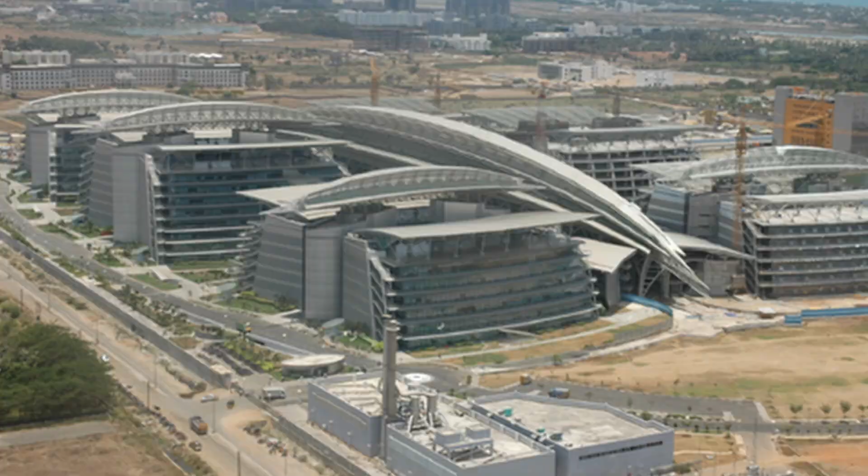This established design commitment in the practice of green building concepts resulted in him being selected as chairman of LEED India. He was also the chairman of the Chennai chapter of IGBC from 2005 to 2022. The Bureau of Energy Efficiency under the Ministry of Power, Government of India, which initiated the Energy Conservation Building Code, has identified Mr. Raghavendran as a resource person for improving understanding and promotion of ECBC norms among stakeholders of the building industry.

Mr. Raghavendran's contribution to architectural education deserves special mention. As a member of the AICTE, the All India Council of Technical Education, All India Board of Studies, Governing Council of National Institute of Design, Ahmedabad, and Academic Council of Chennai University, Chennai, he has contributed significantly to the advancement and revamping of technical education in architecture in India to suit the evolving needs of the industry.

He has held offices in several professional organizations such as Fellow of the Indian Institute of Architects, of which he was chairman of the Tamil Nadu chapter in the early 80s, and a member of the International Affairs Board of IIA and an International Associate of the American Institute of Architects.

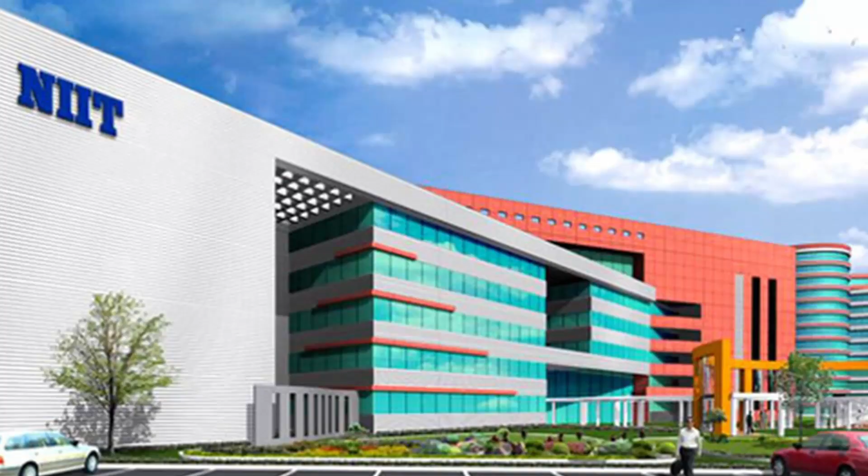Mr. Raghavendran is a recipient of several awards, including the coveted Padma Shri in 2011, IIA Design Excellence Award in 1995, the prestigious Architect of the Year Award in 1996, IIT Kharagpur's Distinguished Alumnus Award received from the Honorable Prime Minister of India in 2011. He was also recipient of Boundless Achievement as Architect of the Year 2023 by PhD Chamber of Commerce and Industry.

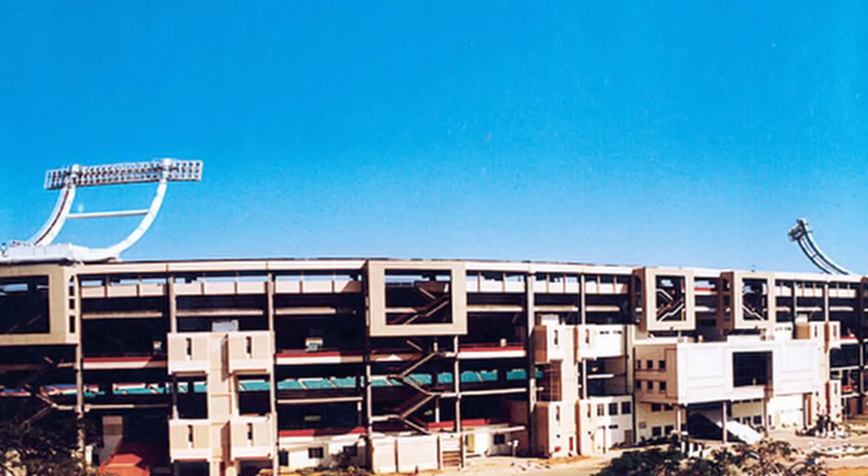USGBC Leadership Award 2020 by US Green Building Council, Construction Industry Development Council Vishwakarma Awards 2019 under the category Achievement Award for Industry Doyen, Indian Institute of Architects Hall of Fame Award 2012, Patterson Cancer Center Award 2003, and recognition from several professional publications such as the Economic Times, ACETECH Award 2007, Construction World Top 10 Architects Award 2007, 2009 and 2010, CWAB Platinum Award of Excellence and Construction World Architect and Builder, CWAB Award 2016.

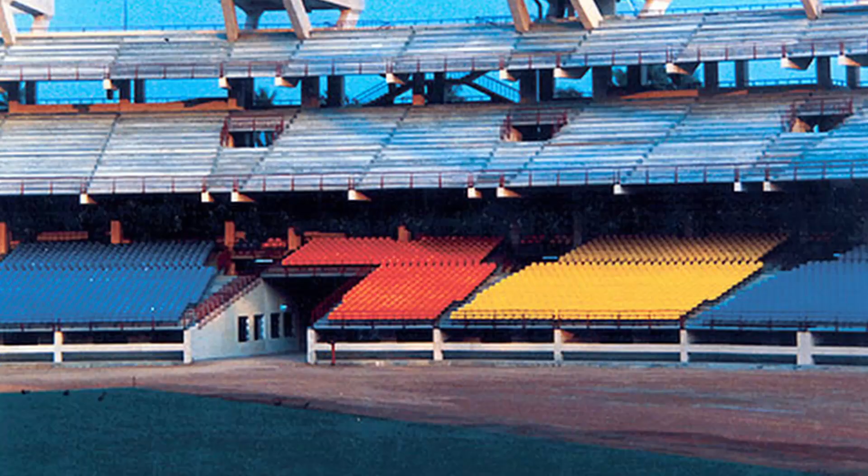He has received special trophy commendation certificates for professional services rendered by him for the Jawaharlal Nehru Stadium, Chennai, designed for holding the South Asian Federation Games 1995, received from the Chief Minister, Government of Tamil Nadu. His works have been featured in several foreign and Indian books, professional journals, and the press.

I have not really specifically prepared anything for this talk, but I was told I should show some works. So what I thought was I will just walk through, from the time of my earliest days and earliest works till now, not as an exhibition of each project or what is unique about it, but more as what it does to us - to the person who designed it, to the people who use it, and to the field of architecture itself - in terms of what goes into making that product of design a success.

Over almost six decades of work, I've learnt a lot, and each project is a learning experience, and learning is never an end in itself. You're constantly learning. That desire to learn and work hard is what makes an architect a successful architect. So my advice to students is: never stop being curious, be inquisitive, ask questions. No matter how stupid you think it may be, it is not stupid. No question is a stupid question. So please, be free to think.

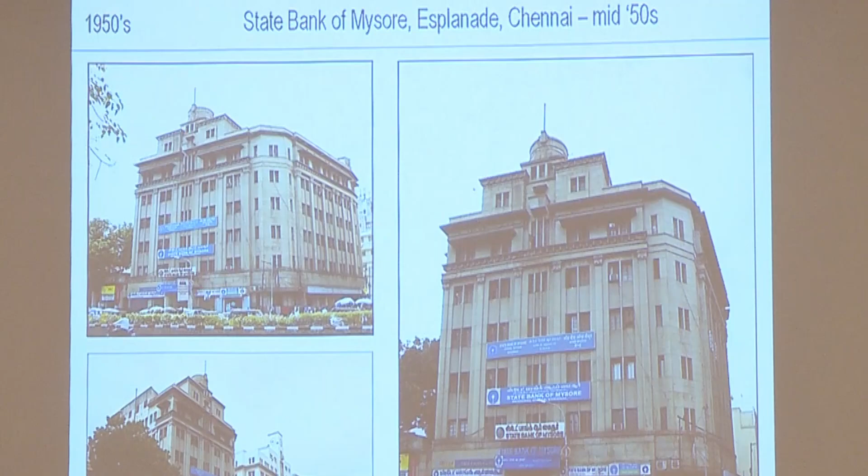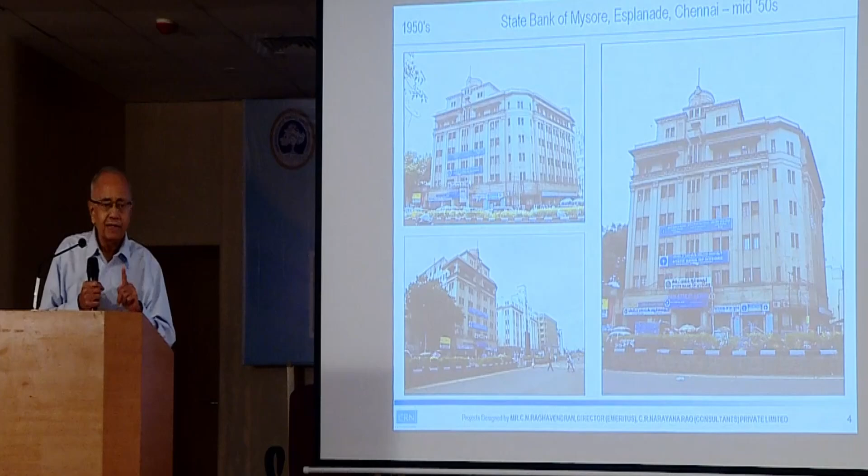I was just sitting in the drawing office, maybe 6 or 8 years old, watching the persons who were drafting or drawing it, and I was not attracted by this. I was only attracted by the pencil that they're using, the number of small pencils they'll throw away each day. I used to think, how can somebody consume so many? Those days there was no computer, no pens, it was just a pencil drawing, hand drafted.

So I was curious that the pencil becomes small, and being frugal - I mean, Indians are frugal, I think South Indians are more frugal than anybody, and therefore you don't really throw away resources. So even if a pencil becomes small, you'll have a self-designed pencil holder, and they'll use it till the last bit. Now, that used to attract a 6-year-old boy - you'll see a tall pencil becoming a small pencil. So I used to go and sit and see what they do on the drafting board.

And then I saw lines being drawn. I was curious about the meaning of these lines. You draw some lines, write something - what does it do? After some time, you find that it becomes a building. So I was fascinated by the thought that a line could become a building. This transformation is what interested me those days, and therefore, as a small boy, I was exposed to a situation like this in my father's design.

What was very common those days was an Art Deco building. It's a classic Art Deco building built in mid 1950s, for the Mysore Bank, and it's still there today.

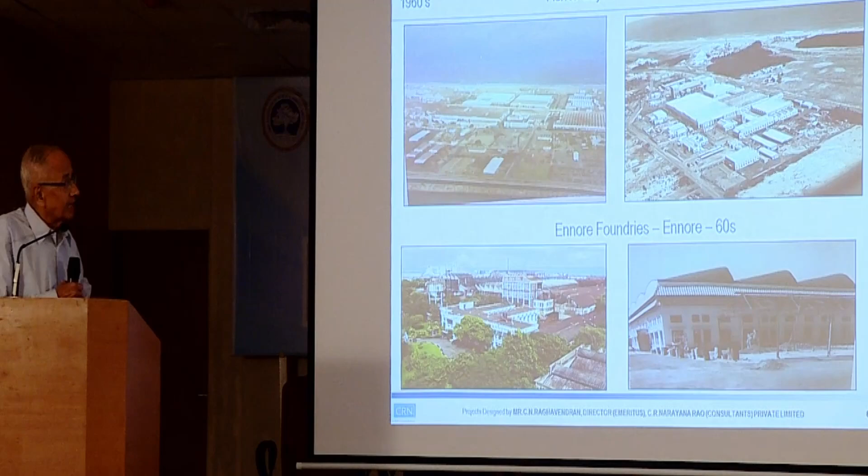In fact, my particular attention is to the last slide, bottom right hand side. This again was done in early 60s. The thing that again influenced me was the technology part of it.

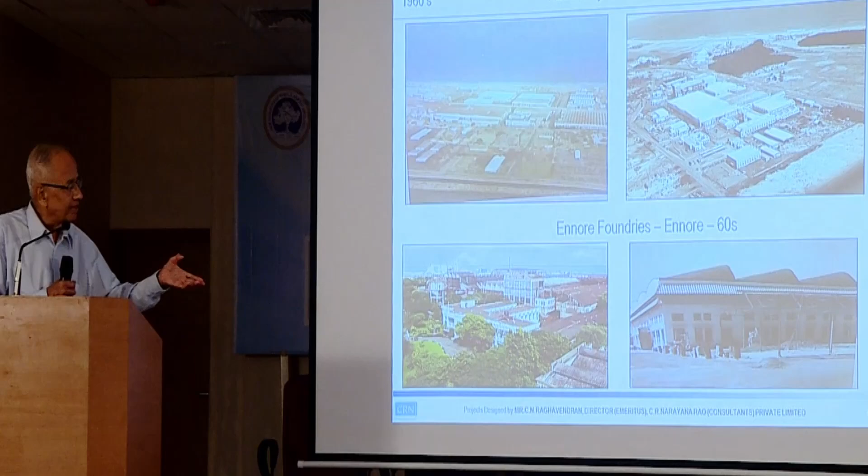Look at the roof shell of the factory building, which had a concrete shell - it's a concrete shell with three-dimensional change in shape, doubly curved and precast. To be done in that year, it's fascinating. Such things were fascinating to me, and therefore later influenced my work also - very seriously, the climate and the technology.

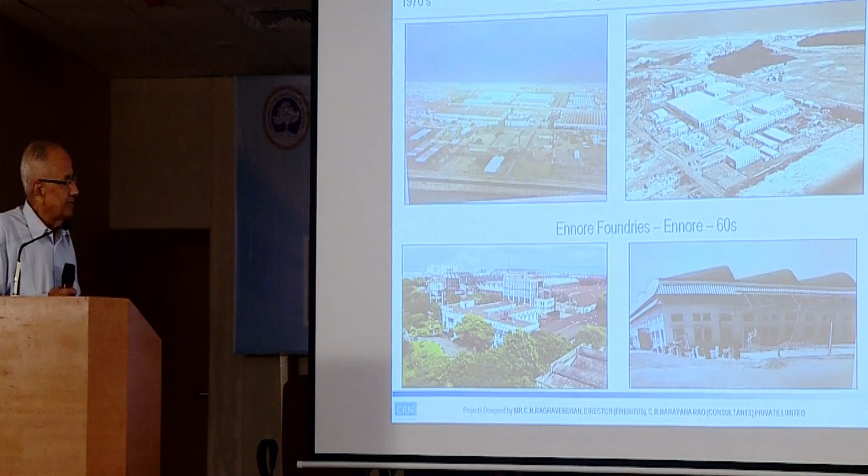This led me to... this is one of the earliest works that I have done. It is again a concept of mixing the lighting for an industrial building, a large industrial building, and not going for steel but precast.

Again, precast is a technology as early as the 60s. In terms of slab and beams, they were concrete, precast and erected inside, so that the construction would become less maintenance requirement and also long lasting, and the fact that it can be done faster.

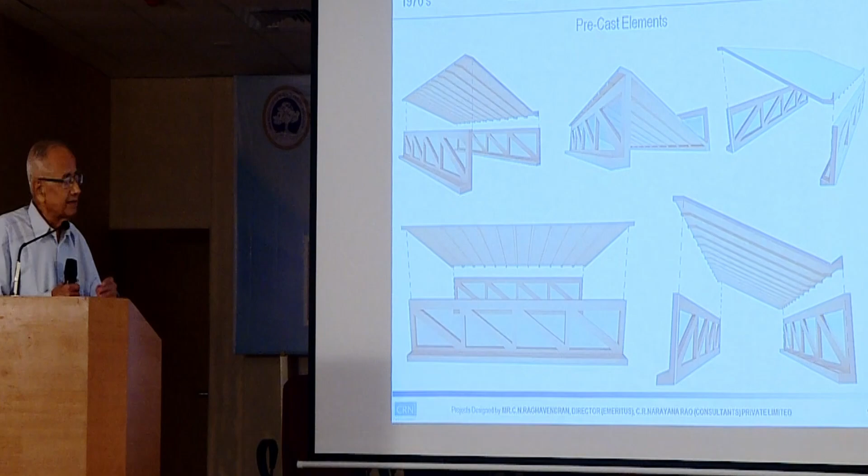So the orientation of the architecture and the structural element, and the understanding of structure for an architect - the importance of it, I came to realize at that point of time.

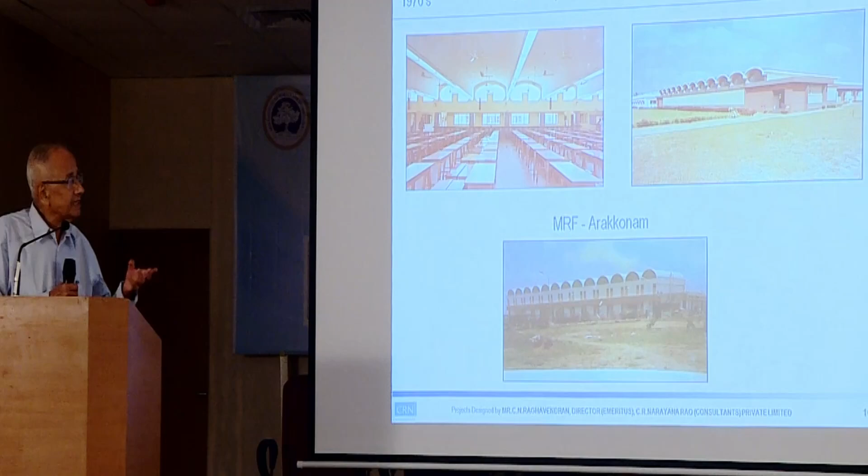or anything or structure. But the requirement dictates an architect to choose a structural solution. This solution of a long span shell roof did not come from a structural engineer, but an architect.

like the architect instructed design which the structural person carries out. So the concept of a shell is again influenced from that earlier factory where you had a doubly curved roof.

So this kind of a double curvature gives flexibility, gives rigidity to a thin member. The thickness of concrete will be only 4 inches, but because of the shape, it gets the capacity to...

sustain itself and also sustain the load. I'll show you some other work, an extension of the same concept, later.

This again is a reflection of a west-facing building. I used to take that climatology very seriously, and this climatology was also taught very beautifully, well done. And today, of course, you have a lot of software which actually helps you to understand the movement of the sun and the movement of shadows.

But it was manually adjusted, so that for what time, what year, what day of the year, what direction, you cast a shadow on a glass. So long as you cast a shadow on a glass, the glass is comfortable, the indoor is comfortable.

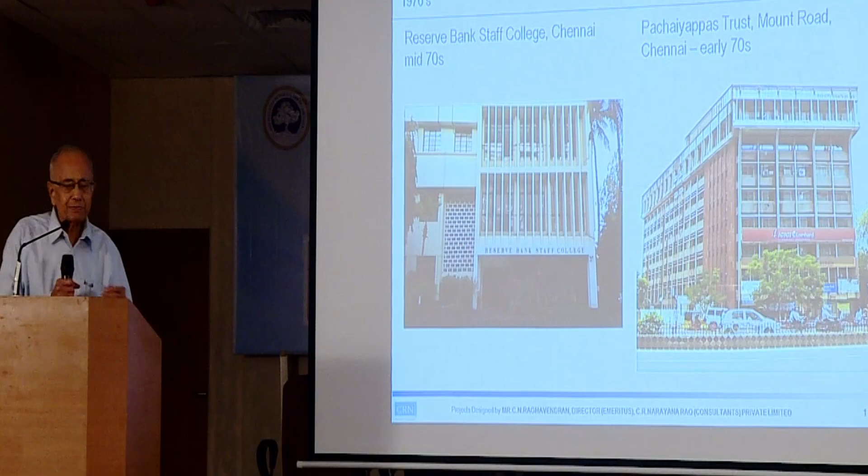An exposed glass is a nuisance. So that concept is developed into this climate-oriented building.

This I'll skip - a lot of high tech. We used it for a building in Cochin for Reserve Bank of India, the previous one. There, the challenge was that the soil was so bad, you had to go 45 meters of piling to reach 45 meters below ground.

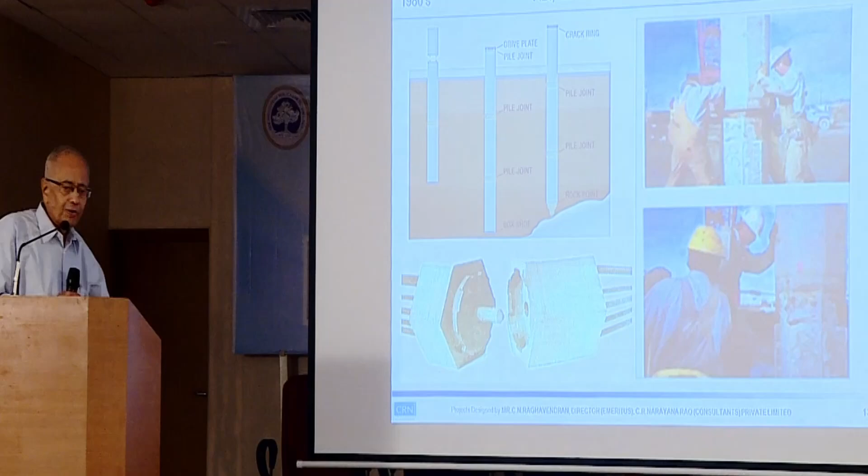And I was very uncomfortable doing that 45 meters of pouring concrete. So we started exploring with structural designers and soil specialists, an architect-led collaboration in which we said, why not we do precasting of piles?

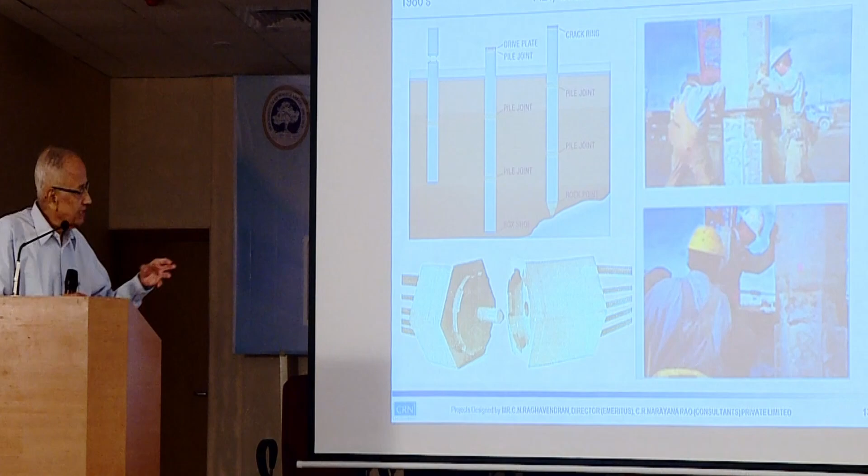Why not invent a system of joining it so that the 45 meter pile is not concrete poured in a blind hole, but instead cast on the ground and driven into the ground, so that you have a reliable system.

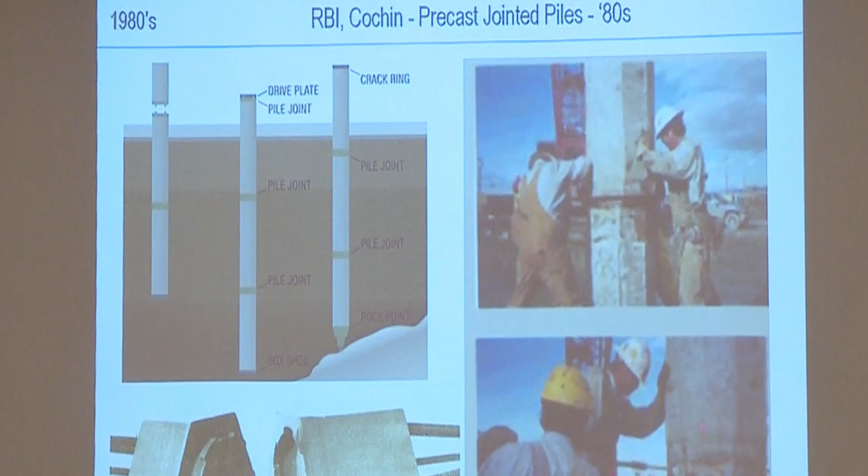So this kind of collaborative learning, collaborative experience, was an extremely interesting activity for me as an architect.

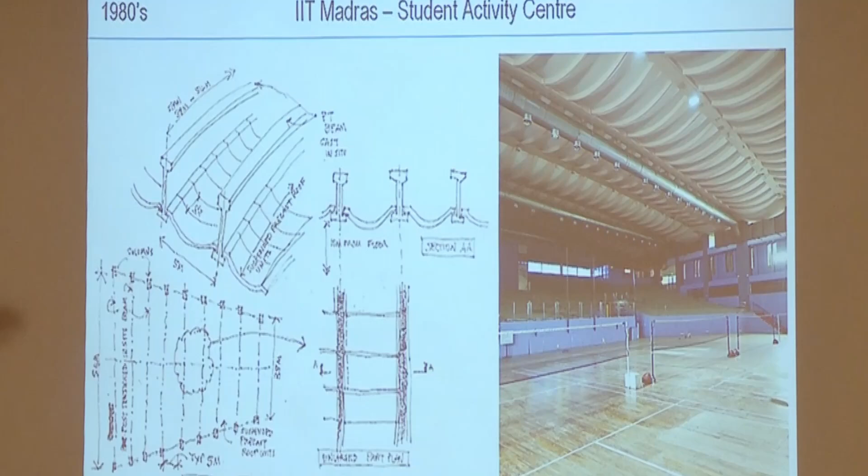The beams were pre-stressed in the 80s. In fact, in the 80s, pre-stressed beams were used only for bridges and so on, but we cross-used the technology into a building, in which the curve section you see at the bottom is precast concrete done at the ground level and hoisted by a crane and lifted up. It has a curve in both directions so that rainwater will run through. You can see this in elements of this thing.

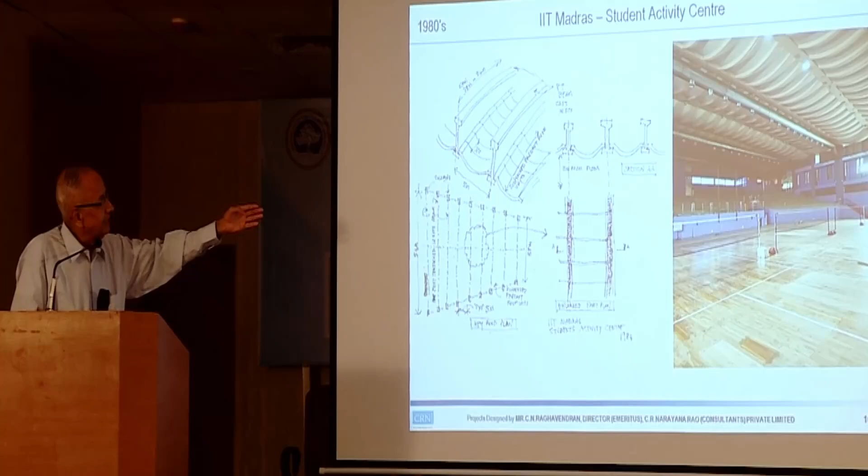So the shaping of members to give rigidity requires a lot of understanding of the material. Materiality understanding is very important for an architect.

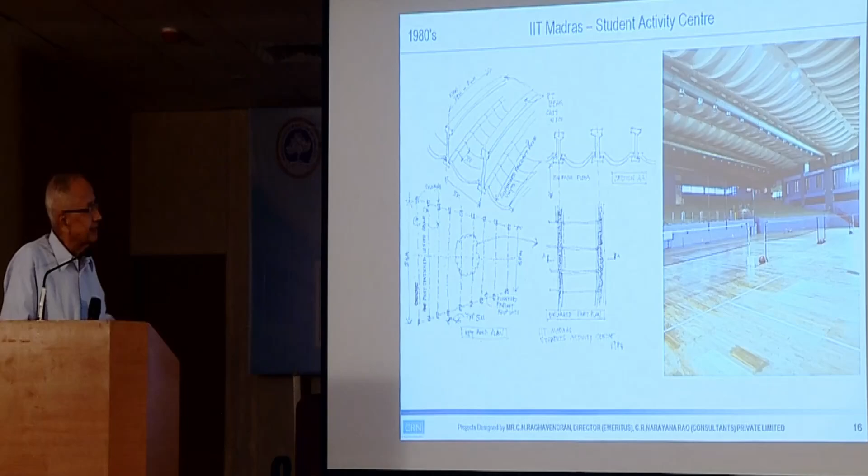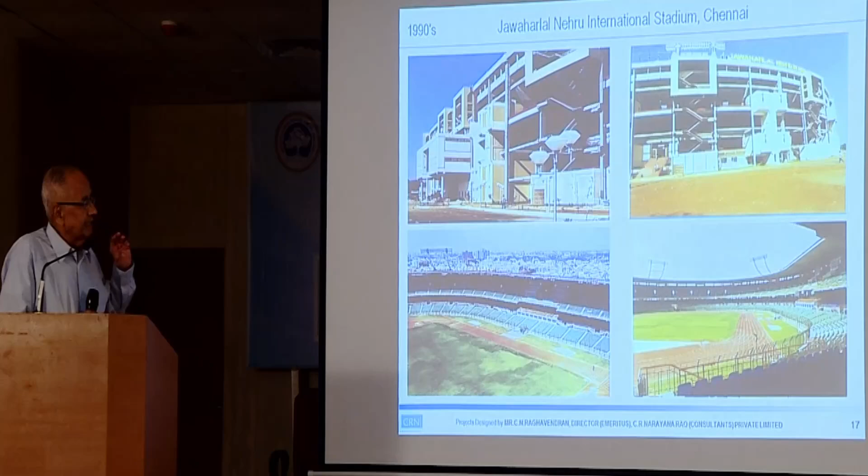This is again the Jawaharlal Nehru Stadium, done in the early 90s. This building was done in 270 days, only because it was completely precast. The whole thing was precast, so the design started with the precast element as a root. Therefore modularity was very, very important and so on.

This is one in which I don't know if you can see in this photograph - the roof is a cantilever about 18 meters, 60 feet, for the seating area, and it has to be very thin. That could be done only by doubly curved hyperbolic paraboloid shells with a very thin concrete element. In a corrosive city like Chennai, even today, the thin element has not shown any signs of rust.

It required a lot of dialogue and discussions, and we stated to the designers and other service engineers what we expect, and unless we have a good understanding of their own subjects, we cannot get the best out of them. So this is another example of such a thing.

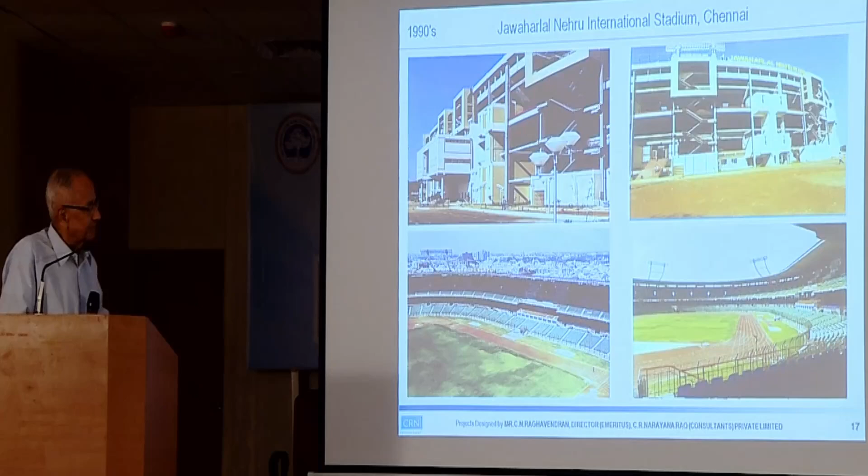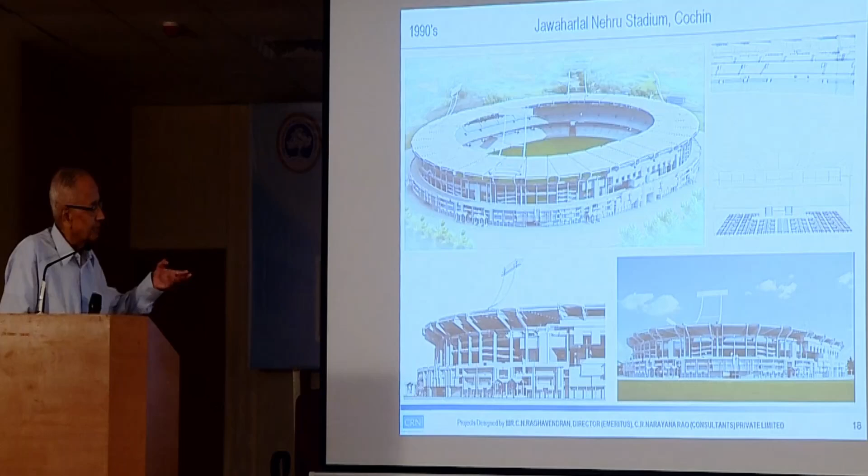At the same time, we maintain our design principles and design thoughts. This is a similar stadium in Cochin we did, and both these structures got awards - one got an Indian Institute of Architects Design award, and the other got an award for the Architects of the Year.

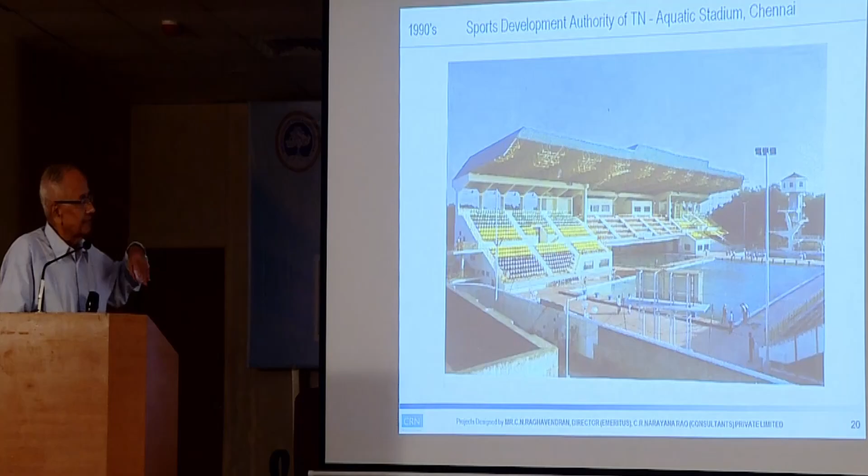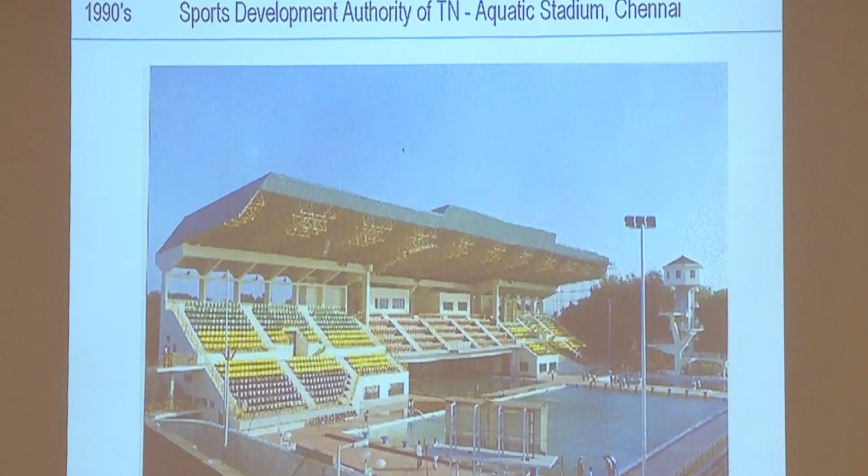Again, a lot of precasting and engineering inputs, integrating both engineering and architecture together, so that people get good, comfortable circulation. A lot of people have to come in and go at a quick time, with their facilities, their sight lines to the sporting area, and overall the constructability of the building.

Therefore, how do you make it comfortable and easy for him? This is where the application of concepts of ventilation and how to pre-cool the air for ventilation comes in, and how it is measured so that performance is ensured. So all this architect-guided integration was taking place.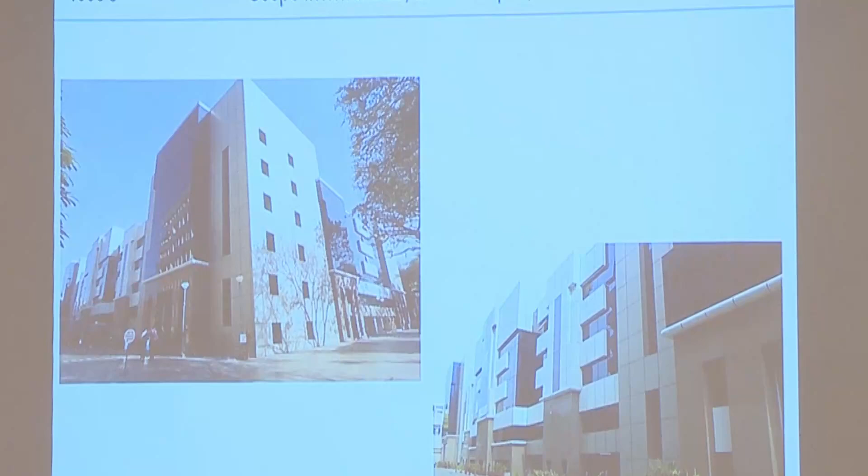This is one of the earliest IT buildings that we've done. They have special requirements—a large span, good indoor conditions, and good interior workspaces. Workspaces must be very friendly and usable.

The people who work in such facilities are young, with an average age of about 26 to 30, and they need a vibrant kind of interior with a lot of natural environment, natural light streaming in and so on. So it's a very streamlined building, oriented so that light is thrown deep inside. Large footprint, but natural light should still reach inside.

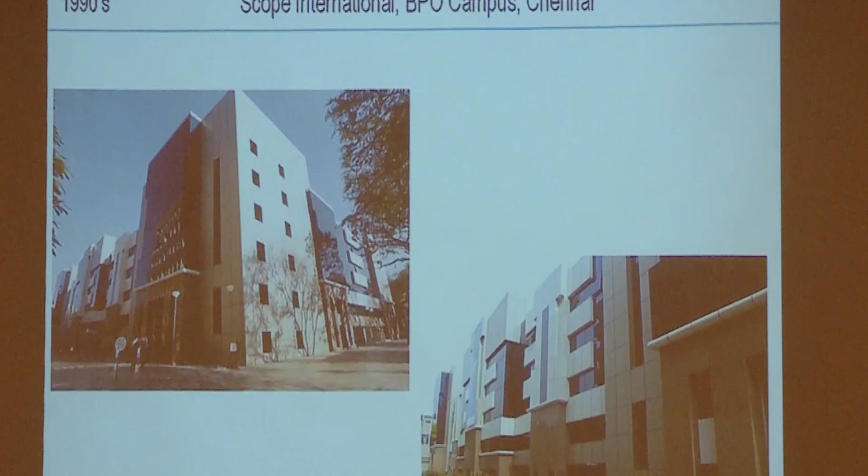That is the purpose of some of the glass panels, but it was controlled in such a way that the glass is always under shade. Let's see.

Like what I showed earlier, these are unprecedented works—not conventional work that an architect is trained or taught, but you have to face the challenge of the building. At this point in time, none of us had experience designing an IT building. What is special about it? A lot of research and analysis has to happen before that to see what environment is required to be created, and then design according to that.

So this is hardcore design, hardcore integration of services, and hardcore facilities that make the user comfortable and that are energy efficient buildings. In fact, these buildings are all highly energy efficient.

So this is the entire heat recovery, rainwater harvesting, and air conditioning system. In fact, the air conditioning system we used here was one of the most energy efficient systems of that day—even today it is so. It's not a conventional air conditioning system at all, but it uses the differential between daytime and nighttime temperature to adjust so that night times are cooler.

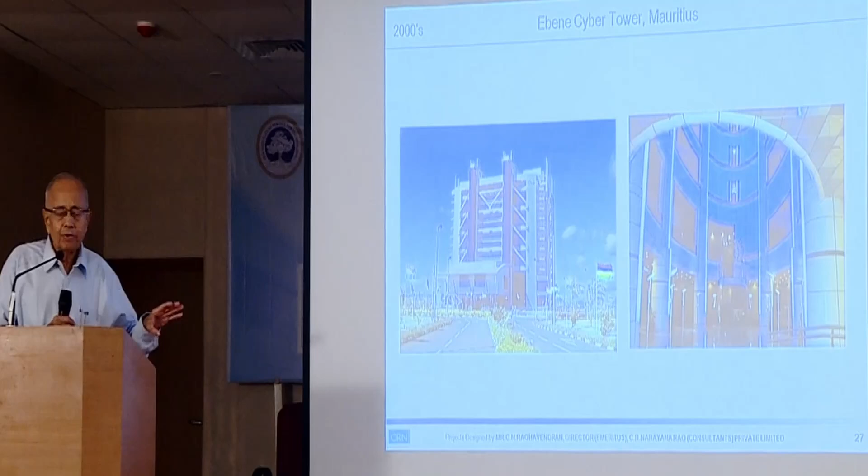Therefore, they came to India, and this is an Indian-funded, Indian-managed project. All materials went from India to Mauritius, and the advantage was that this opened up the entire Africa as a gateway to Africa for Indian IT business.

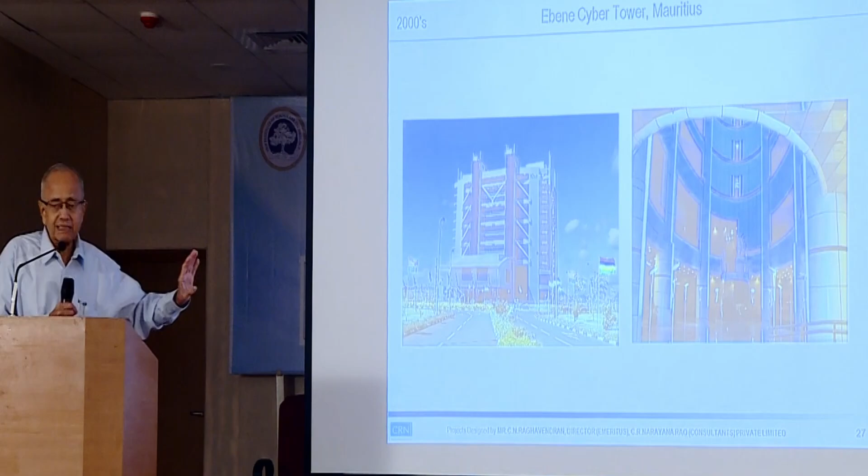Therefore, Government of India thought this is a good investment, and in terms of a deal with a friendly government, it also furthers India's interest in IT.

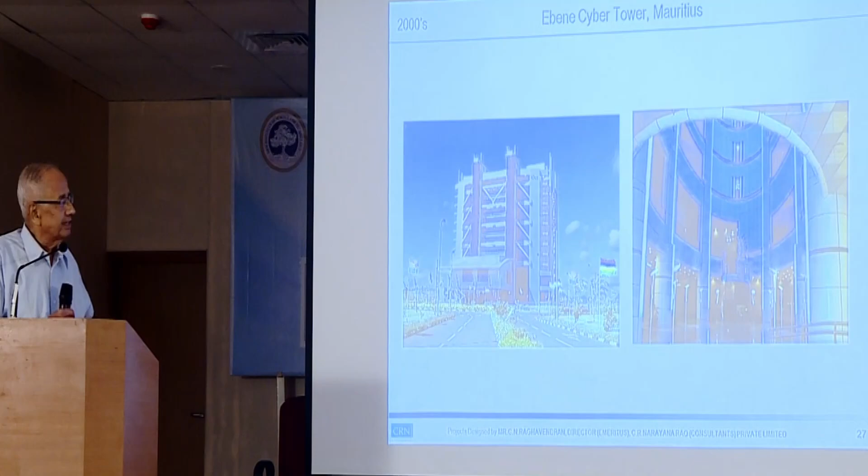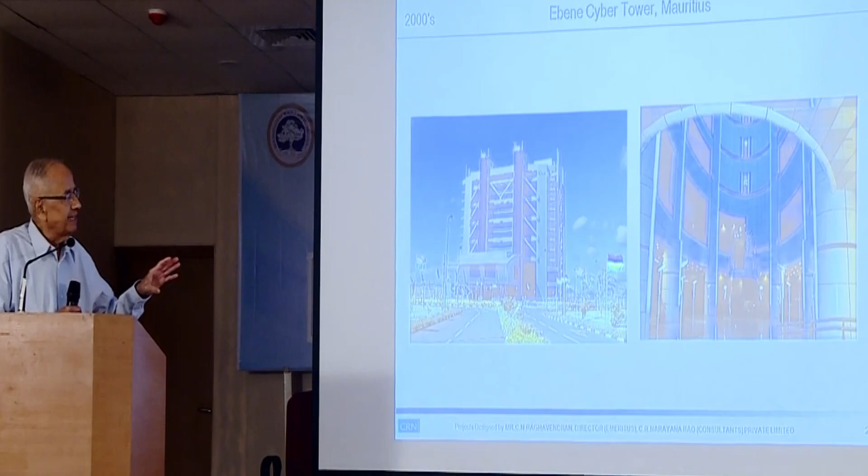In this building, again the challenge is creation of ample lighting. In fact, hardly any electrical load comes out of lighting.

That's because there's a huge tall atrium inside that takes care of lighting on both sides, from exterior to interior. So hardly the lights are switched on here.

And the air conditioning, cooling, the glass, the high wind loads - in fact, Mauritius wind load is extremely high. So that is again a challenge.

The structural engineer told us that the wind load there is 3 times higher than the highest wind load that Indian code requires, because Mauritius is a small speck in the Indian Ocean. Any cyclone or anything happens, the whole city could be wiped out. So their requirement was such high.

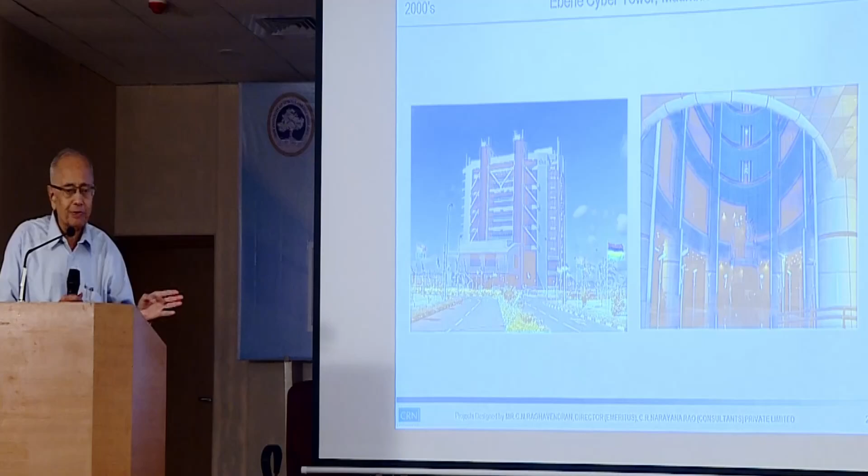So we thought of expressing the structure through external bracing, an externally braced building. How do you integrate it with architecture?

That was the concept that we did - the bracing, all these diagonal members, are structural elements which give rigidity to the building during heavy winds.

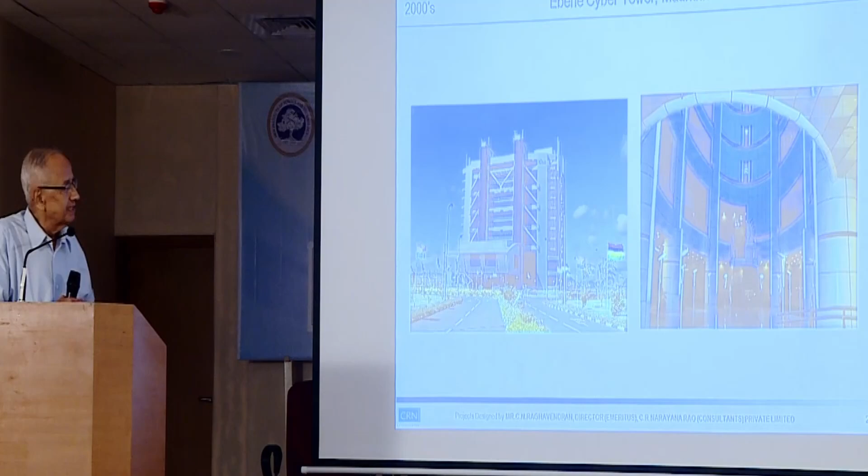This is the light well, where we see the courtyard and view of the lobby.

A very extensively landscaped site, so most people prefer to sit outside, even though it's a Chennai climate, but just because of that extensive overhang that comes out.

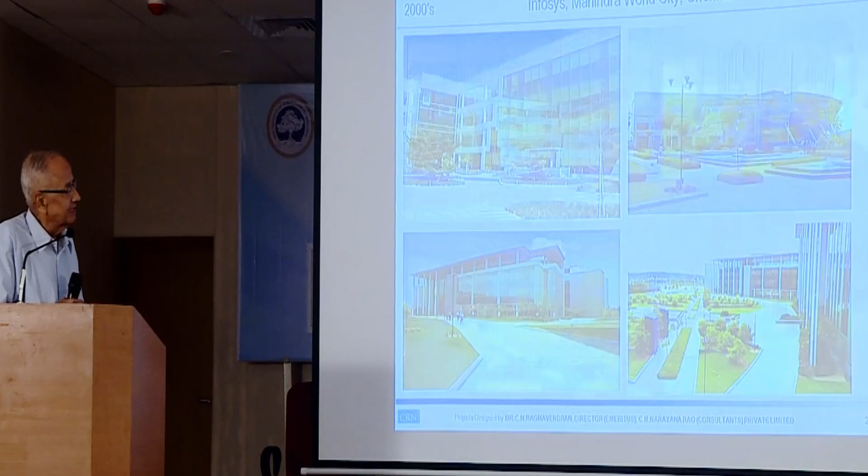That was prior to COVID, but after COVID it has all become work from home mostly. It's a complete township by itself.

From transportation - all 50,000 people have to be brought in and taken out, in buses and all kinds of modes of transport. They have to reach out to the work, they have to do the work.

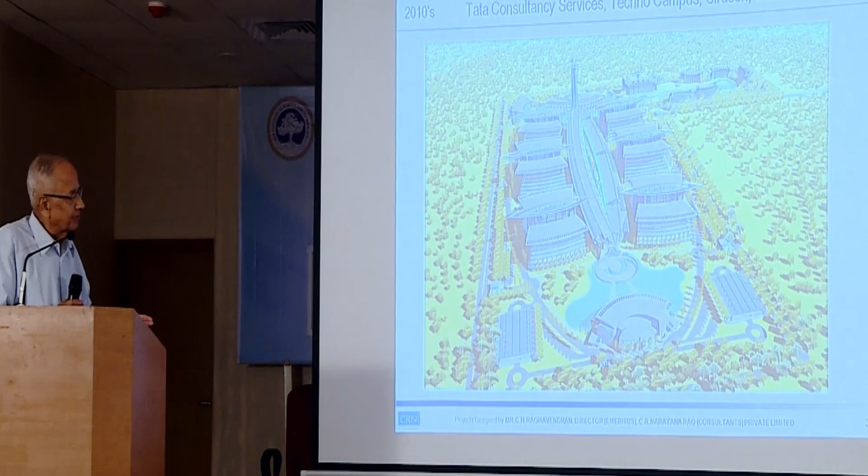They have shopping, they have dining, they have library, they have training facilities, they have research, and conference facilities and so on.

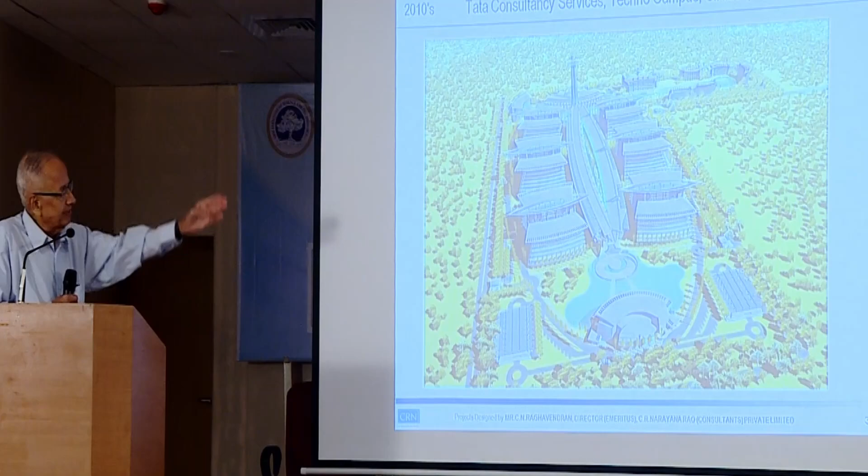And the concept that we did was to create a central spine. That central spine was nothing but a street, a common street. We called it a street because that's almost like a street - it's like a typical Indian street in which everything happens.

And if you see a typical Indian street, from childbirth to death, all activities happen on Indian streets. That's unique, I don't think anywhere else it happens. So that, of course, minus the transport, minus the cars and buses, gives you a lot of livability, lots of dynamism to that space.

That space is enveloped by this building, so that people who work here really feel a sense of ownership in this building. They feel attracted to come and work in the building.

In fact, we created a roof at the top for two purposes. One is it creates a large hall. Number two, it actually shades the lower room below from direct incidence of solar rays.

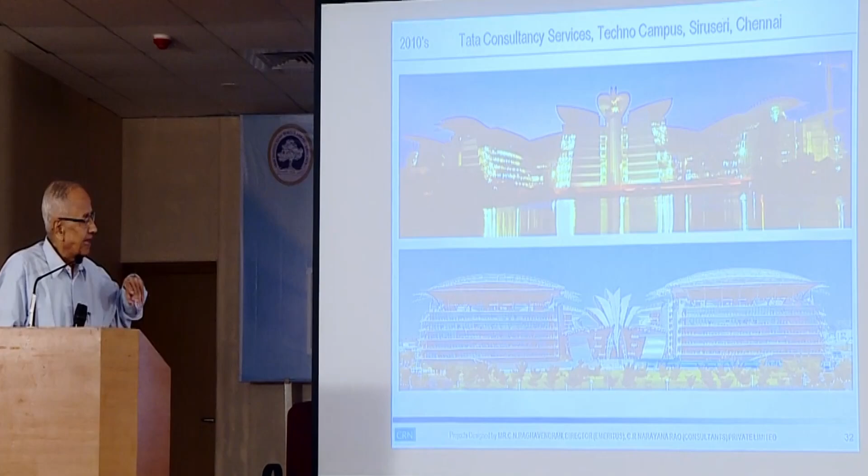And we had to create some dynamic forms for this street so that it's attractive.

In fact, this concept is also based on the image of a bird going out, the spirit of flying, the spirit of exuberance on the street below. That concept is why this central spine was roofed.

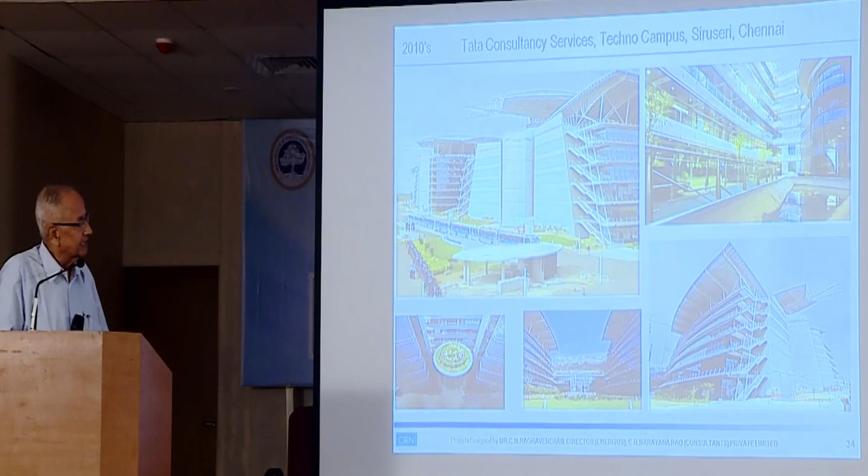Here we have different views of the same campus. This is another IT building in Hyderabad.

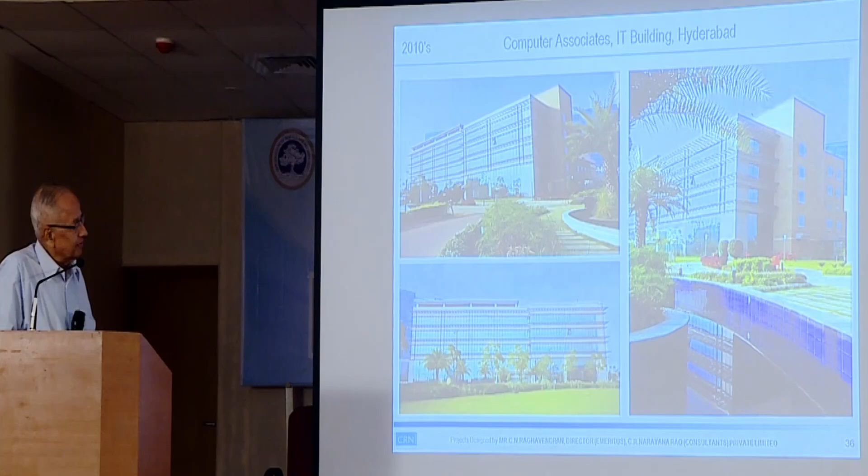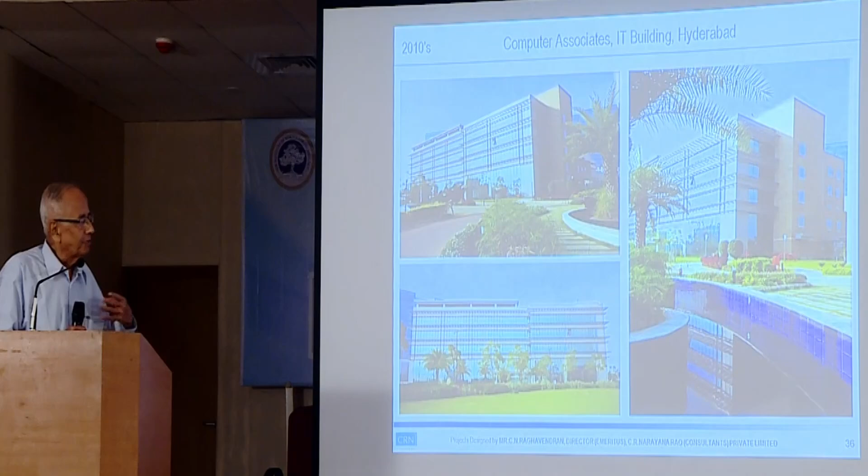This also is a building in Hyderabad. For this also we had to integrate a lot of solar shading devices on the front, and also integrate water bodies and landscaping around the building, considering that Hyderabad is a dry, hot weather. Any water body creates a microclimate of coolness around it because of natural evaporative cooling. So that extensive use of water body around the building actually cooled the surrounding peripheral areas by a couple of degrees, and therefore the building becomes more comfortable to be within. So the air conditioning also becomes more efficient.

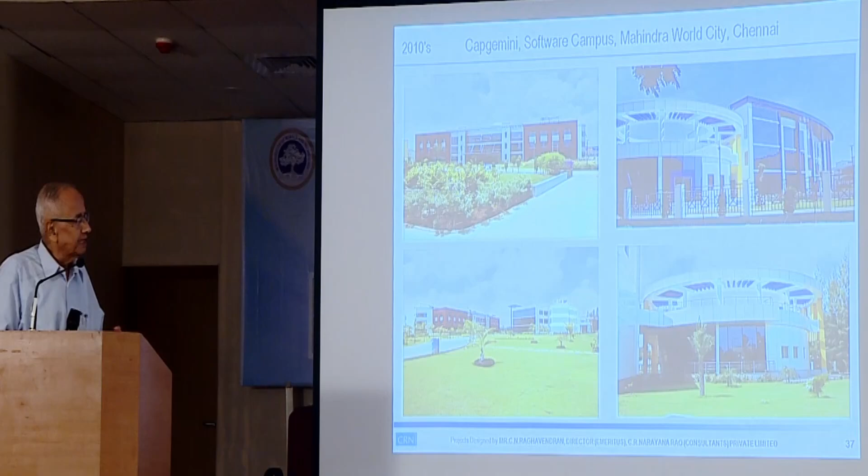These are all platinum-rated buildings. This is another campus that we did in Mahindra World City for the French company, and this also had all the features of green, sustainable principles. Basically, two things govern sustainable principles and making the workspace attractive, likable and healthy to the workers: indoor air quality and the visual vibrancy of the interiors. All these things make a place more dynamic and interesting to be in, especially considering the age of people who work in this.

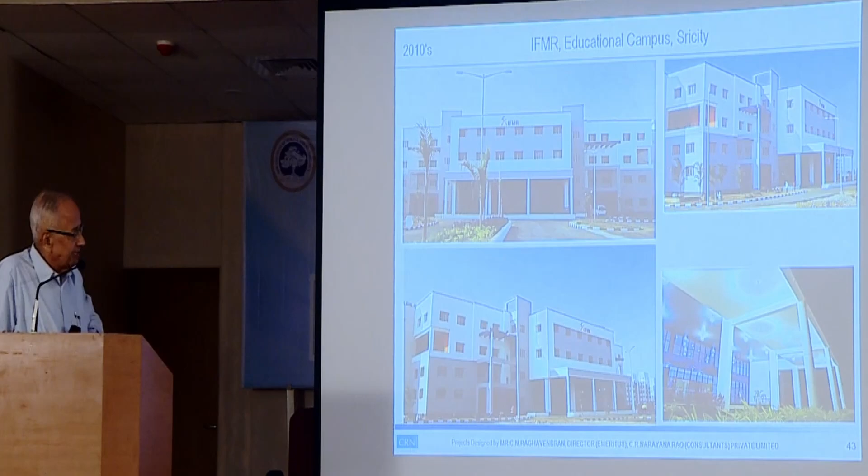This is an educational campus we did at Sricity for an institute called IFMR, that is Institute of Financial Management and Research. This is very climatically designed in the sense that it's a very hot place—Sricity becomes very hot in summer months. So windows and glass ratios and all that were controlled, and a lot of shading walkways and shading devices were put all around the building, as you can see in the bottom photo, right hand side.

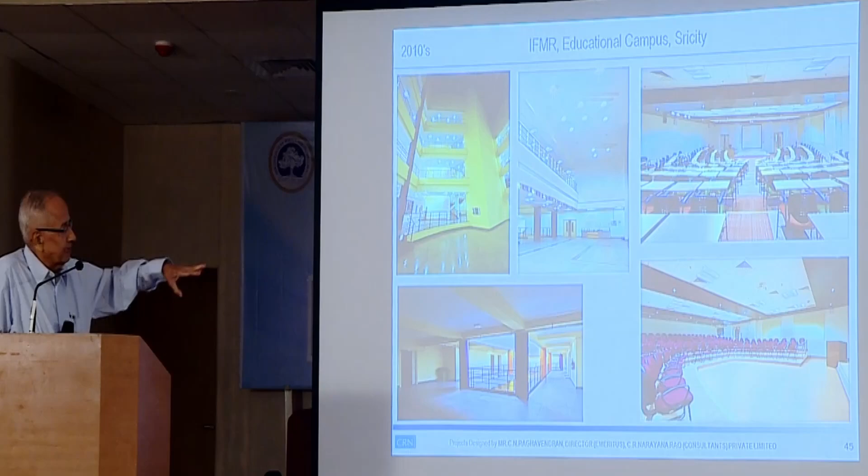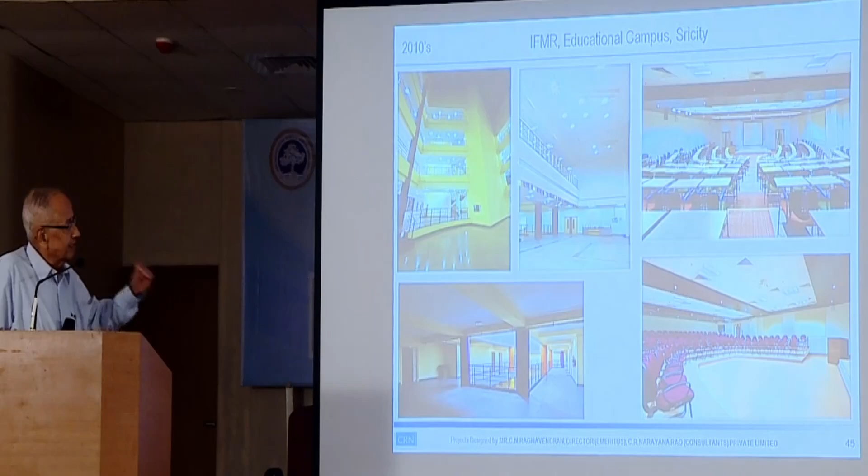These are the internal spaces within that campus, where you have large lecture halls and meeting places, courtyards, and overlooking courtyards with activity centers and so on.

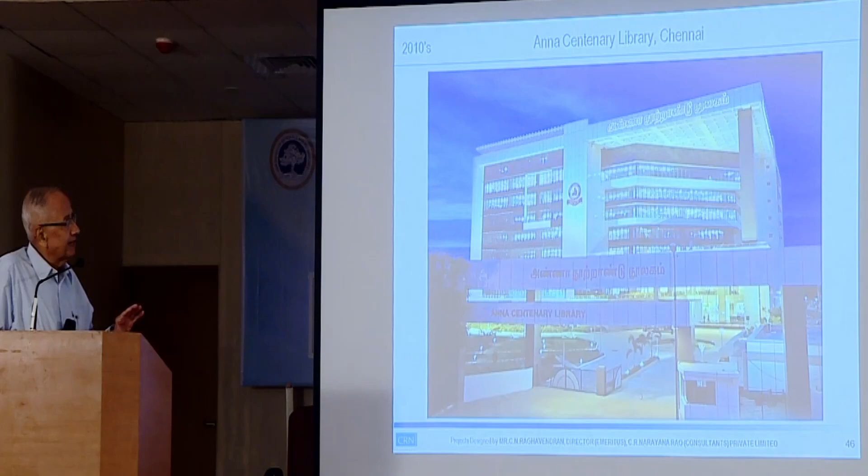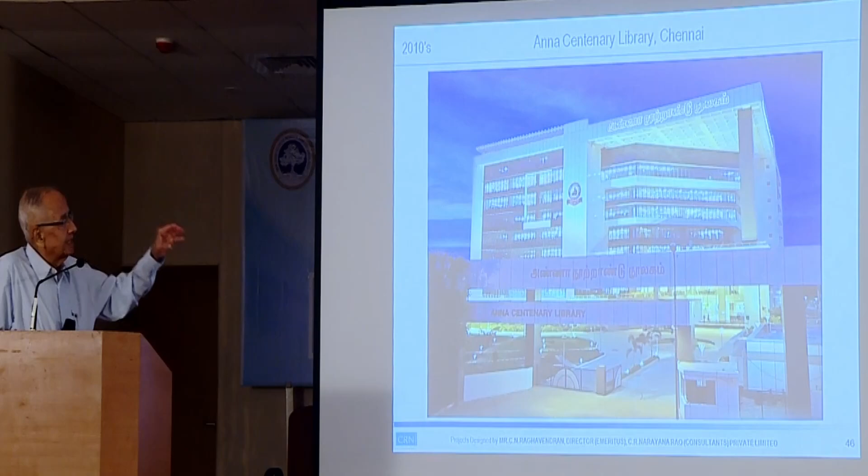This is Anna Centenary Library; most of you must have seen it. A lot of consideration is given in terms of improving the natural light for the library reading areas. It also has an integrated auditorium of more than 1,000 capacity. This again has an internal courtyard, and externally where the sun comes from, we had a huge roof projection. The original intention was to put everything into solar panels, but that project never came through. It's still capable of taking a solar panel right on top, but they have other means of power efficiency built into the building.

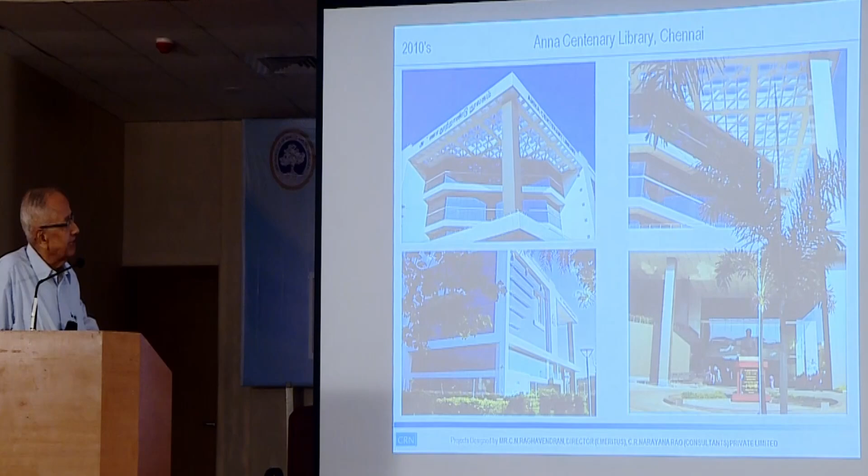Different elements of that, with some again casting shadows. The casting of shadows on the building was one important element that we felt would add to the openness of the building—you can free up and open the windows and glass areas if you do shading.

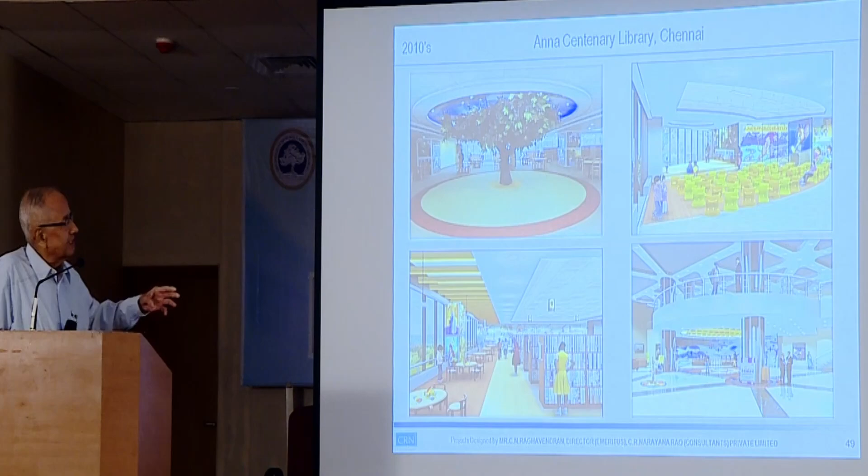This is the children's section. We created a small tree because typically learning happens around trees in schools, in villages and so on. So for children we created a space for instant plays and small activities together, and the regular library was also there.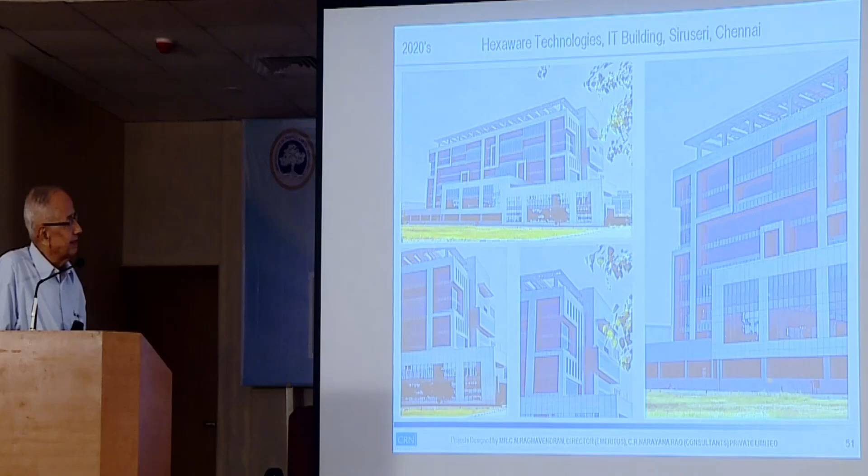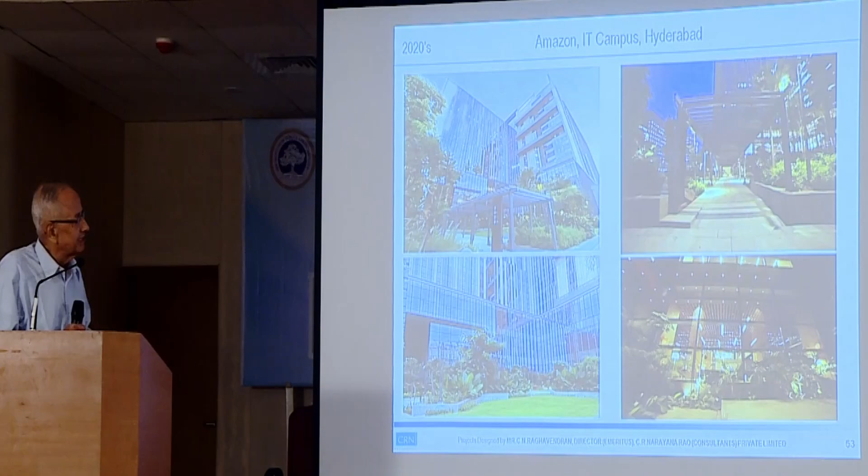This is how the landscaping integrates the view from the building at all levels, multiple levels.

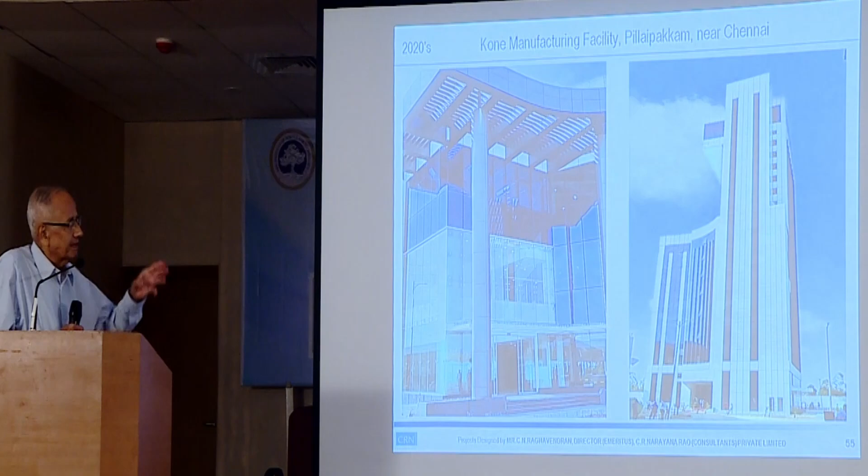This is one of the recent buildings, a manufacturing facility for elevators, and the tall building is the test tower. So the test tower had to be not just a test tower, but it had to be something else. Through discussions, we tried to create a building which is more than just a figure sticking up in the sky.

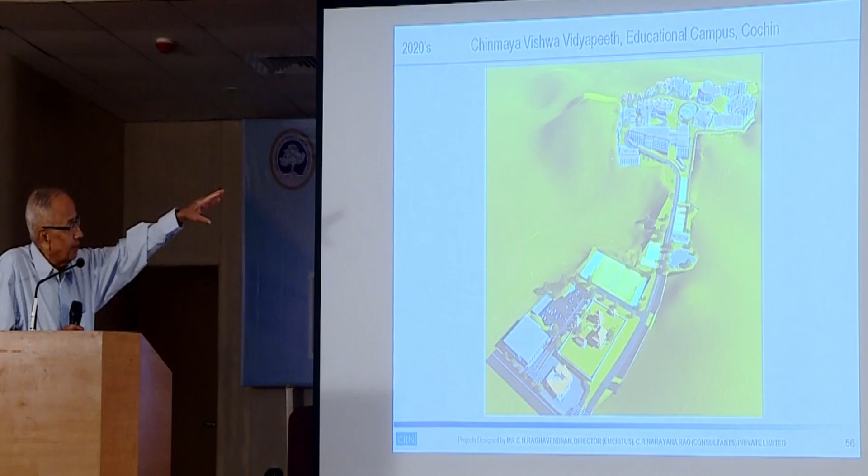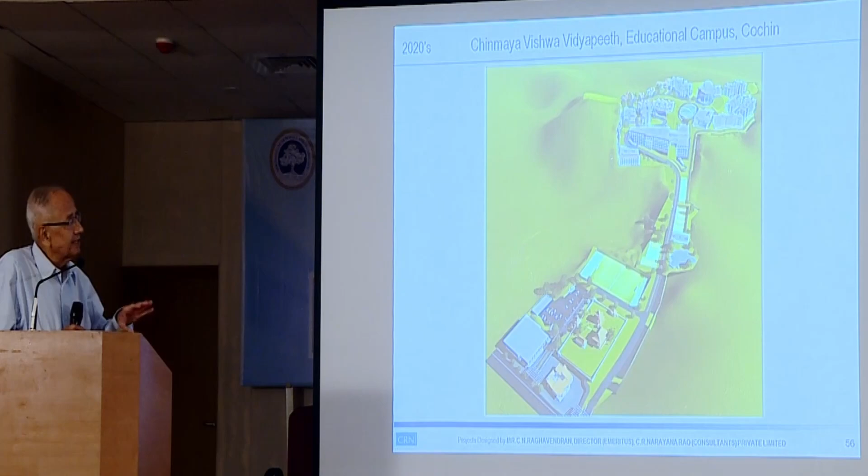These are current projects going on for a university at Cochin, for Chinmaya Vishwa Vidyapeeth. This is an extremely sloping site, and the difference in level between entry and top is almost 80 meters, all rock. You cannot excavate rock too much because there's a regulation by mine geologists.

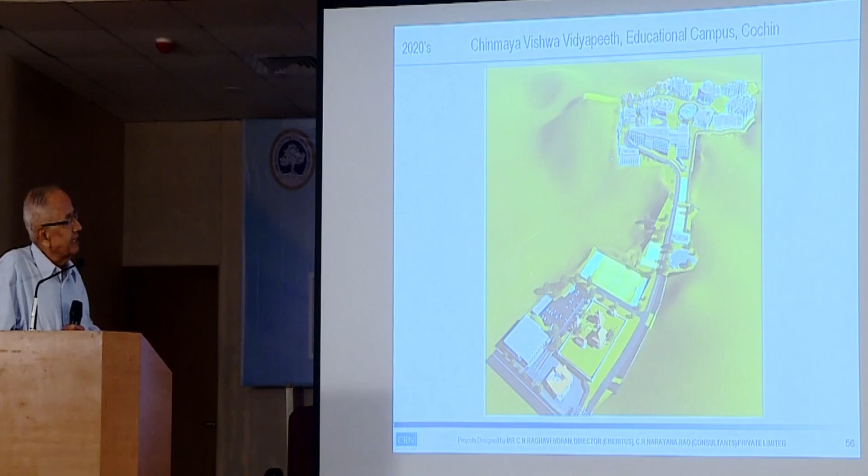So the play of levels and buildings all around the contours is extremely important. At the same time, once inside, it will be a completely pedestrianized campus with a lot of open spaces and meeting spaces for students and faculty. It had living hostels, dining facility, play spaces, all this. Even though it was densely packed due to steep site conditions, careful integration of open spaces and built spaces in a loose grid creates a lot of interesting vistas and meeting spaces inside.

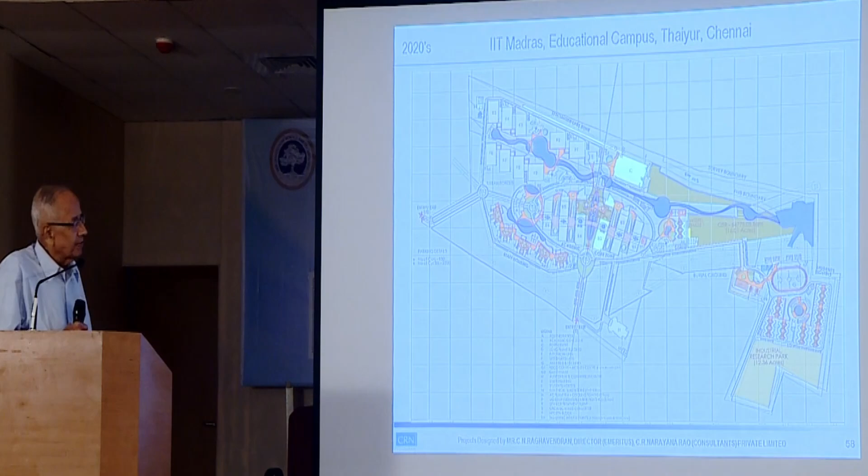This is the IIT campus at Thaiyur, the second campus coming up. This is a special purpose campus because the focus is on research here, not on generating BTechs and MTechs. It's completely research oriented, and therefore they had different grades of security. Some high-end research happens in the central oval, which is completely protected from other areas. No outsider can get in. They wanted high security levels, accessibility controls and so on.

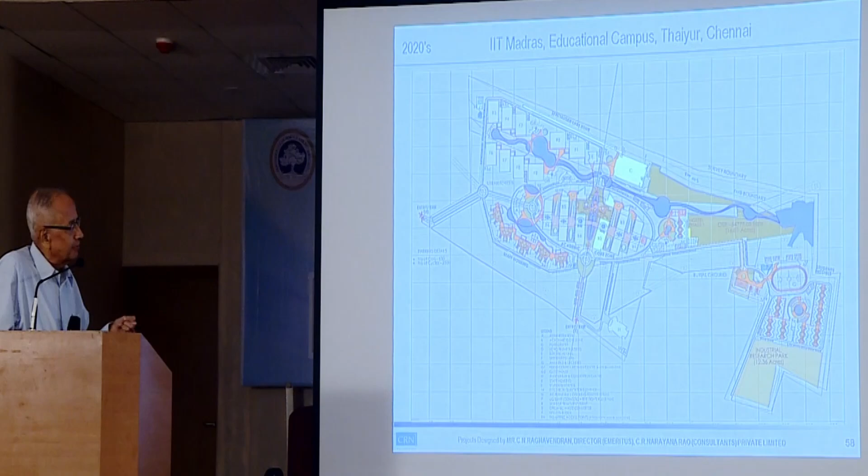There's a natural waterway running through. We tried to keep the waterway as it is and regulate it so that all the buildings flow along it, apart from the oval area where high security work is done. In fact, some of that work is highly national security and defense oriented. Research goes on in the middle, and then you have a street walkway with a water body taking you through the other departments.

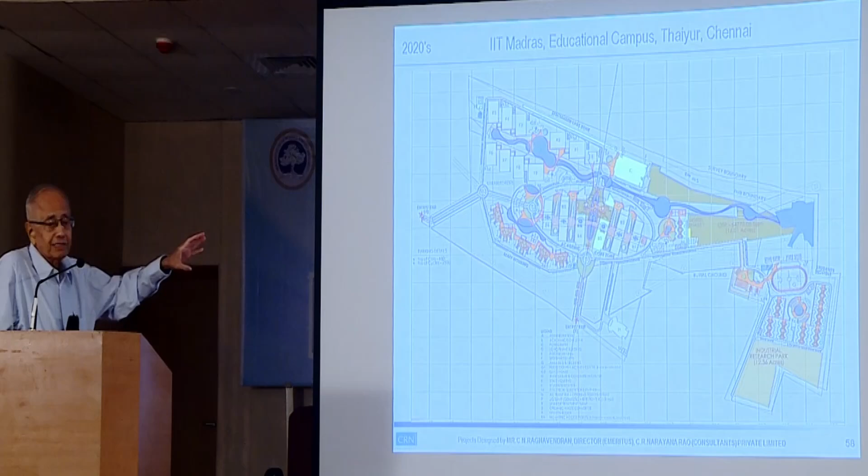It's a very user-friendly campus where people feel a congenial attitude was built into this area. Scientists and researchers don't always work in the lab; they also sit outside to think, work, and discuss. That's why this streetscape with a water body was created, using the natural contour and natural waterway.

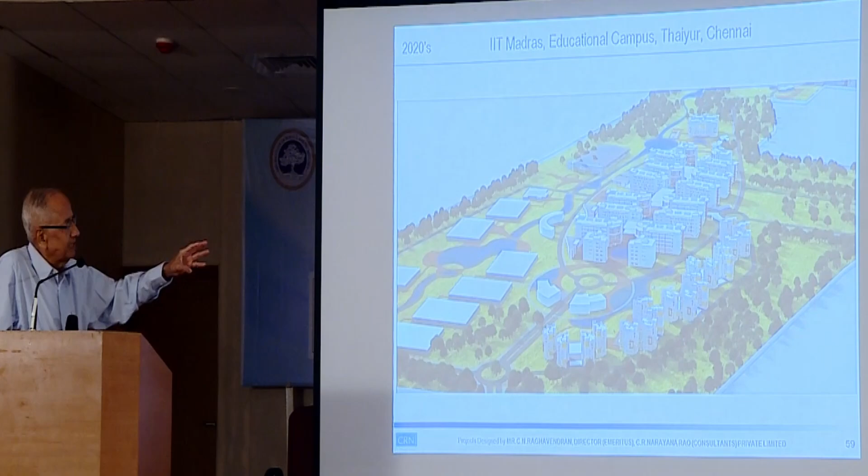This is how the campus was done. In the research oval, we had a central spine also, which, once inside the security, the movement happens through the center, completely shaded, so that walking from one building to another in the open isn't exposed to severe conditions.

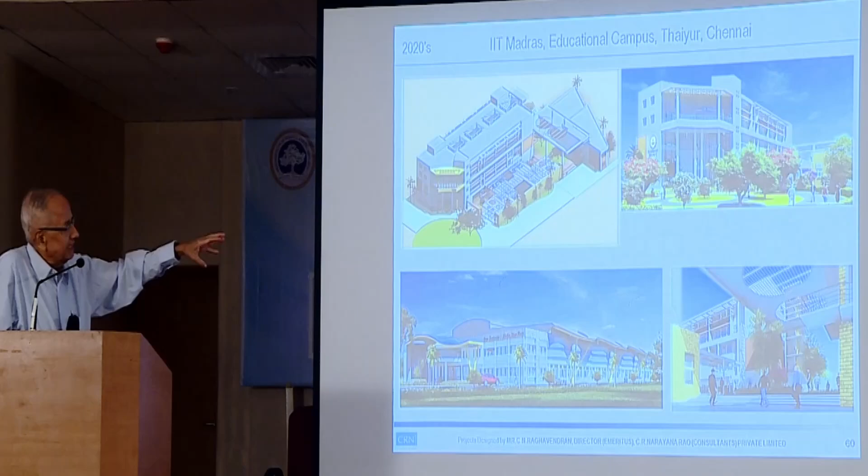These are the buildings in the campus. This is typically a research block with open spaces, pergolas, meeting spaces, and a local water body passing through. All the rainwater is collected in a local water body and then channeled to the spine canal.

That's just a broad summary. But I thought the experience of running through this integration of disciplines, with a focus on technology and sustainability, revealed factors essential for completing this work. You dream of a building, but your responsibility is also to make it work in the end. So that link is very important for an architect.

Not anybody else's work—I design, somebody else builds. You have to stay till the end; end-to-end service is part of our work. Thank you.